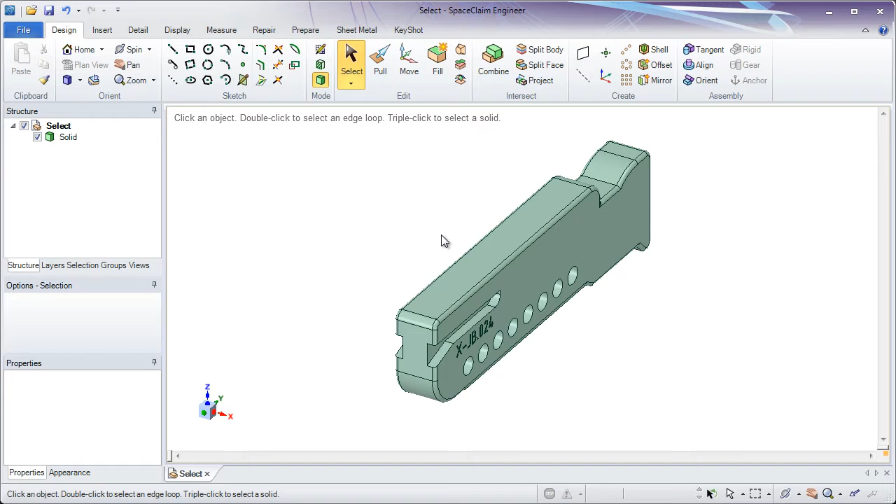Before we get started, as a reminder, to rotate the model, hold the middle mouse button down. To zoom, hold Control and the middle mouse button. And to pan, hold Shift and the middle mouse button. Remember, if you want to change the way you spin, pan, zoom, this can be done in the Options panel under Navigation.

Now, the basics of Select are pretty simple. Click on something on screen to select it. The important thing will be knowing whether you've selected a face versus an edge versus a point or a vertex. If you start to select different things and you want to know what's selected, you can always look in the bottom middle of the screen to see what's highlighted here.

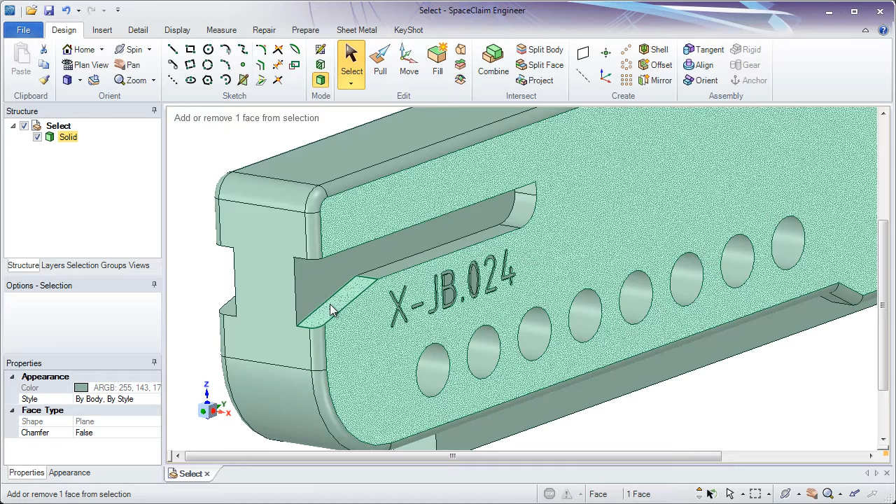And if you hold the Control key down, you can select on multiple things. You can even select on edges, faces, and vertexes at the same time. Every time you have something selected, you can go to this middle of the screen to see what's in your selection. In this case, I have 3 faces, 2 edges, and 2 vertices. The same way I add to my selection by holding the Control key down, I can use this to remove things from my selection. By Control unselecting things, I now have 1 face, 1 edge, and 2 vertices.

The fastest way to remove things from your selection are 2 different ways. You can click in white space anywhere here, and it instantly removes things from your selection. The second method, if I have things selected as I do here, is pressing the Escape key on your keyboard. Pressing Escape will also remove things from your selection.

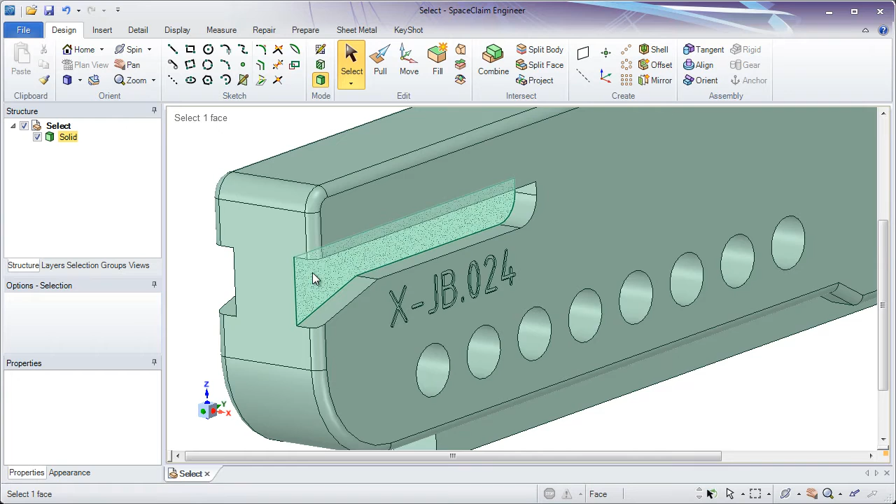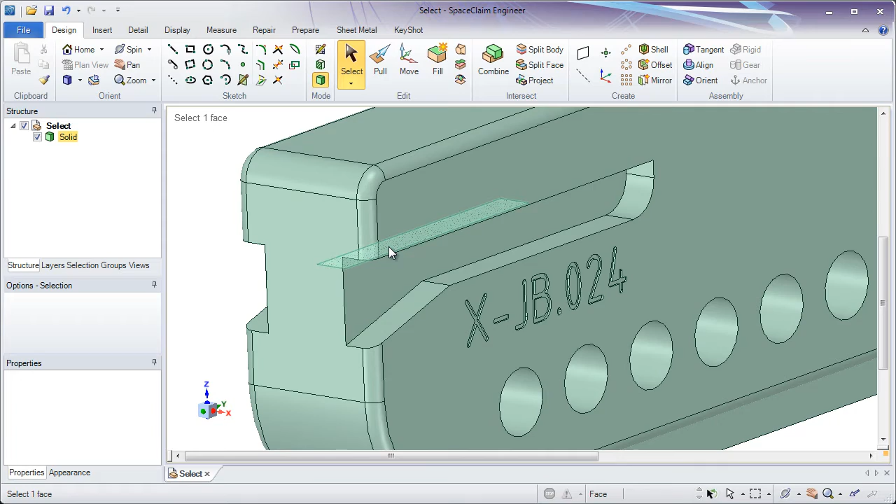Now, as we're moving through the model and selecting things, sometimes you want to select on hidden things on a model. This can be done by using the mouse wheel on your 3-button mouse. The same way you would scroll up and down a web page is the same way you can scroll through the model in SpaceClaim. It selects straight back through the model to give you all the faces and edges which might be there under your cursor. This can be done again. Scroll your mouse wheel in or out to select what's behind your cursor. Once you have your cursor there, click to select that thing.

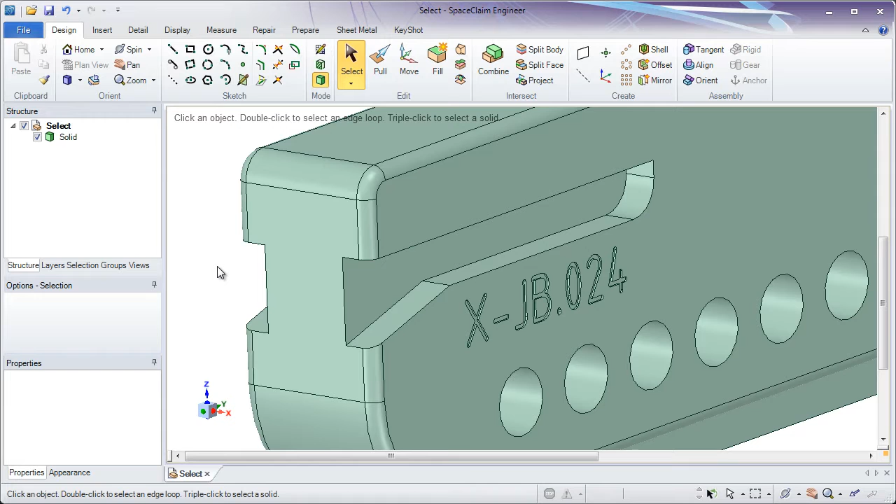As a reminder, if you did go to File, SpaceClaim Options, Navigation, you can set your middle mouse wheel to not query like we've been doing, but so that it zooms in and out. If you do this selection, this option, remember to hold Control to do a query select.

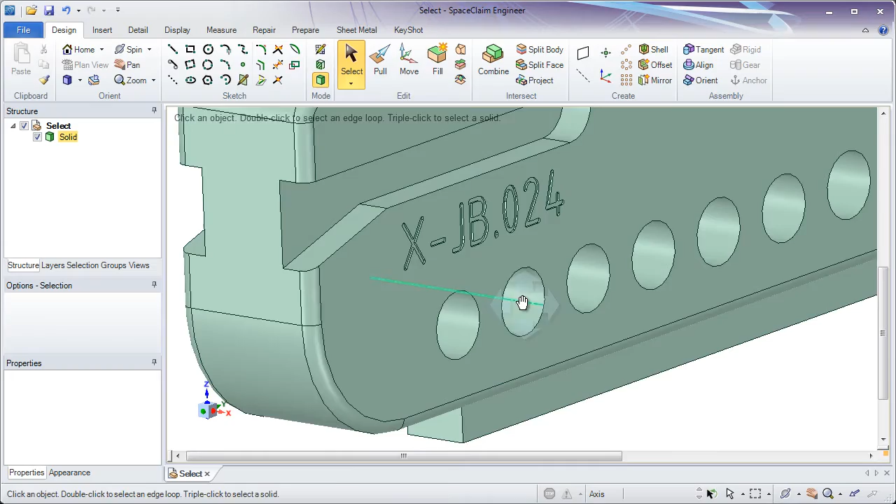Also, while we're here, let's take a look at some of these holes. I want to reinforce the difference between faces, edges, and in this case, holes also have axes. You'll notice as I hover over these holes, axes appear. As I hover over the 4th one, you'll notice the first axis disappears. We provide these temporary axes on the screen to help you select and locate and navigate the centers of holes.

Only 3 will appear at a time, and as soon as you clear your selection by clicking in white space, they all go away. This will be important though, because selecting a face will give you different results in pull and move than selecting an edge and selecting an axis. We can experiment with what happens when you select on an edge, an axis, or face with pull and move later on.

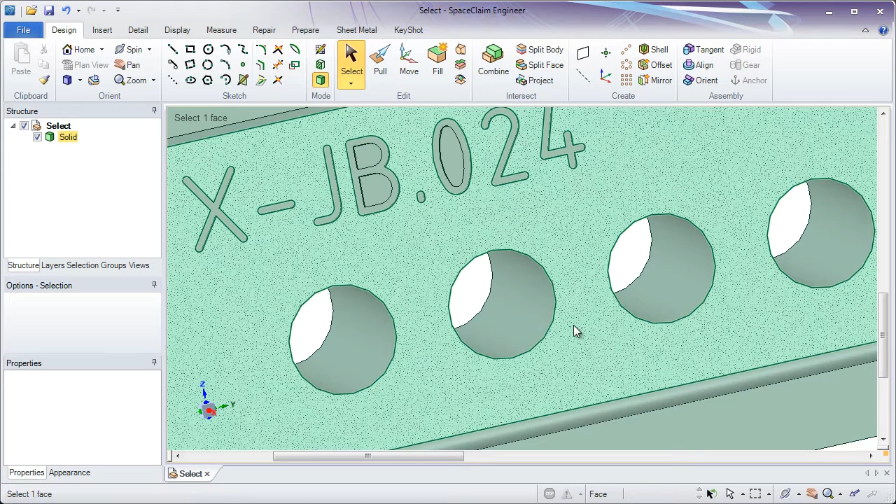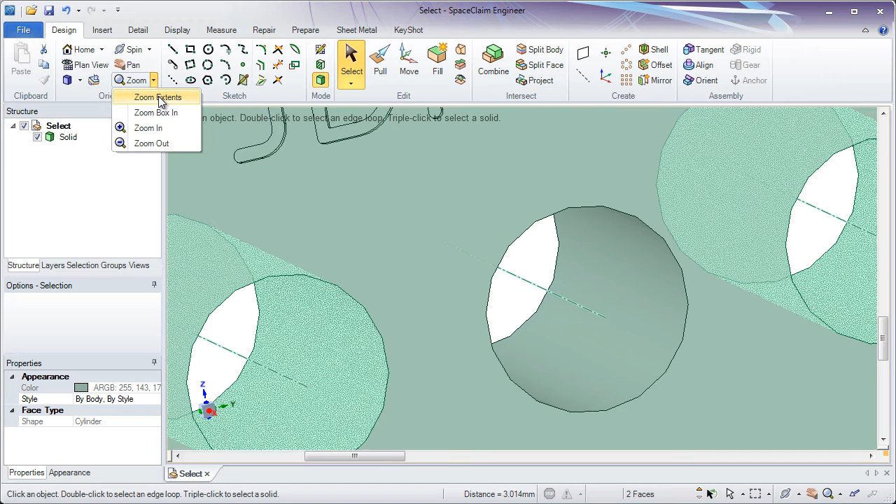Lastly, while we're here, let's look at quick ways to zoom in and out to get our selection. If you have a face selected, there's a very fast way to zoom in on it by going to Zoom, Zoom Extents. This will zoom into whatever is selected. If you have 2 things selected, like these 2 holes, by Control selecting them, you can Zoom Extents to zoom into them. You'll notice the shortcut for Zoom Extents is Z. If I have nothing selected, when I hit Z, it zooms into the complete object.

This is a very fast way to zoom in and zoom out on different things on the screen.

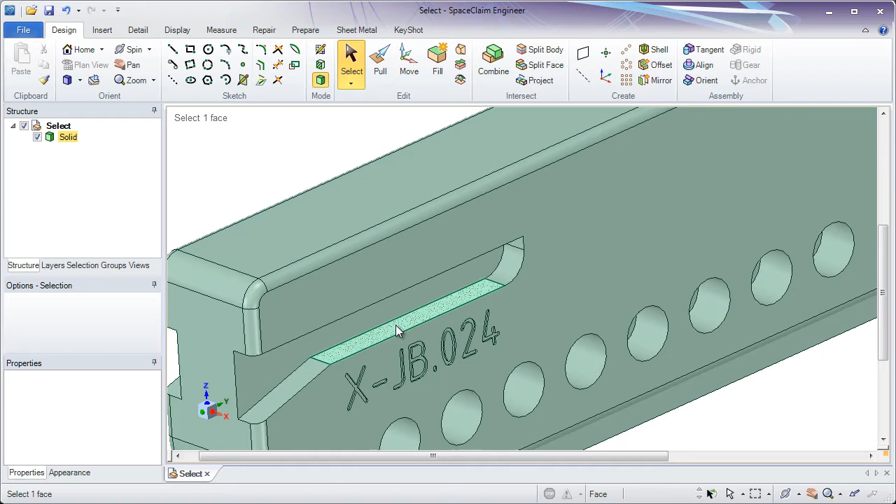Now let's get back to selecting. A common way in SpaceClaim to select multiple things is by double-clicking. This is similar to the convention in Word, where you put your cursor and double-click to expand your cursor to select a single word.

In SpaceClaim, double-clicking will give you tangent faces. You'll notice it selects the face here, the round, and the face on the other side. If you double-click around, it has all of these tangent faces there, but double-clicking a round gives you the round chain. The reason for this is because that's probably what you'd like to modify, either changing the round size to make it larger or smaller, possibly removing it, or toggling it to a chamfer. We've tried to change the selection to make it easier to work with.

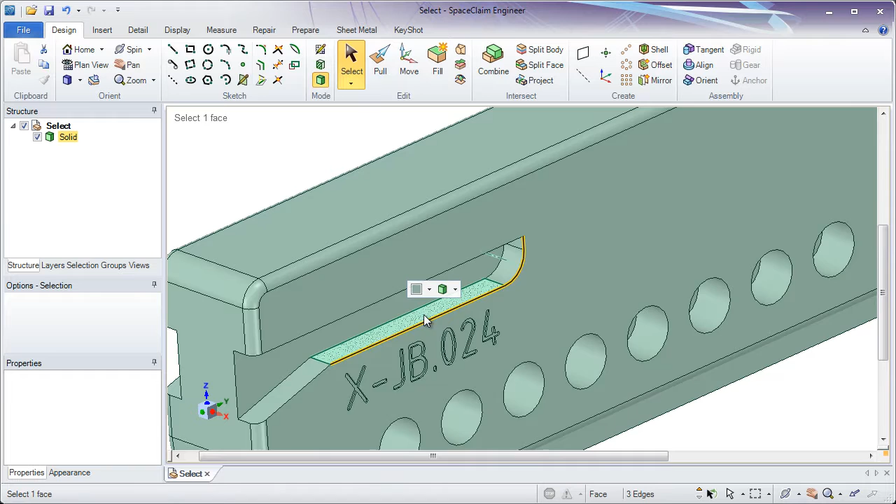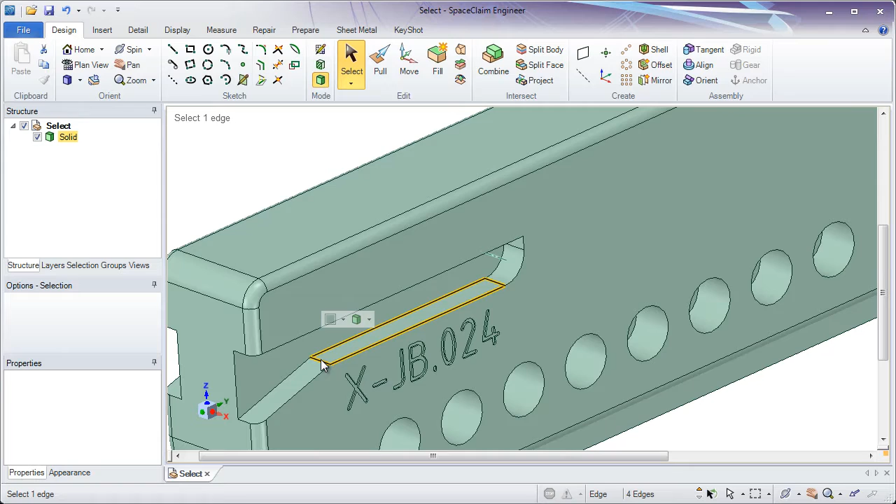Also notice when double-clicking faces, you can double-click edges. Double-clicking an edge will grab you that tangent edge chain. However, what if you wanted a different edge loop, like the loop around this face? Simply double-clicking a second time will toggle to a second edge loop. Double-clicking a third time will toggle to the third edge loop. So double-clicking will toggle through the different possible edge loops that are there. In the case of this face, if there are only two edge loops, it will only toggle between the two available. This is a fast way for grabbing edges around a model.

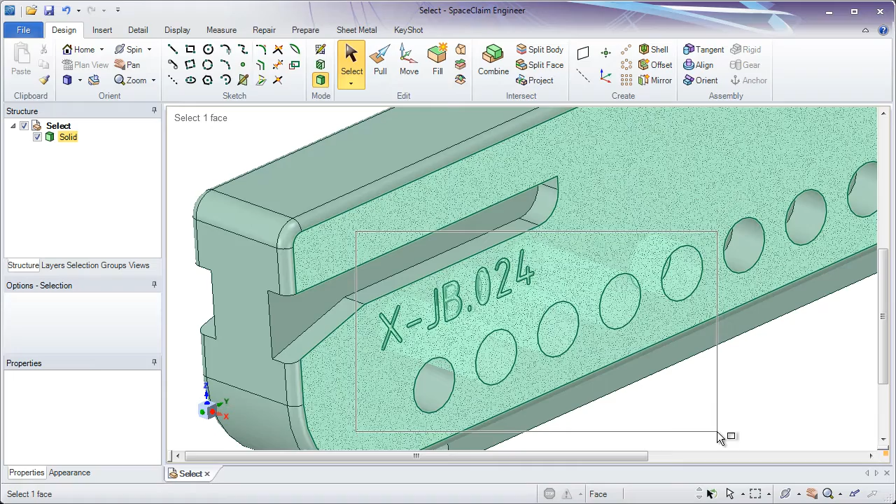One of the most common ways to select things in SpaceClaim is via a box select. It's very useful for selecting a lot of geometry. Holding down your left mouse button lets you draw a box on screen to select everything that encompasses it. The key with box selecting is to pause to see what's in your selection. Right now I have the X. If I make it bigger, I have all the letters and a few of these holes. As soon as I let go of my mouse, I can see what's being selected.

Now the key with box selecting is that there's a difference between box selecting from left to right versus right to left. If I go left to right, only things entirely in my box get selected, and we operate under a smart selection hierarchy, where if I start my box and there's only edges in it, only edges get selected. As soon as faces enter my box, faces begin to be selected. If you'd like to control this, look at our selection filter on the bottom right-hand corner of the screen to get exactly what you need.

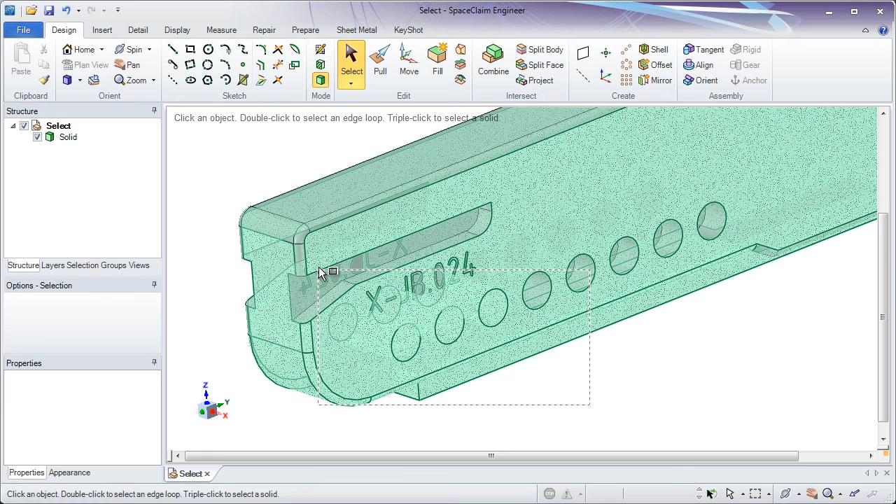Most of the time you'll want to box select from left to right, as I'm doing here, and pause to see what's in your selection. The other method is to box select from right to left. Box selecting from right to left will select anything that crosses your box. Notice I get a lot more geometry really quickly when box selecting from right to left. This is commonly used when changing the color of objects, selecting any piece of a model to hide or show, or moving things into a different layer. For precise selection, it's much more common to box select from left to right. And remember, if you pause for a second, you'll be able to see exactly what's in your box to make sure that's what you'd like to grab.

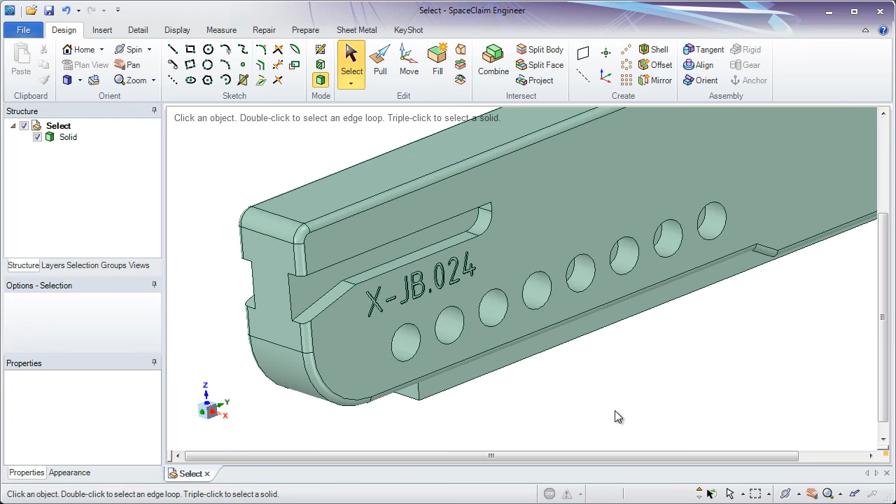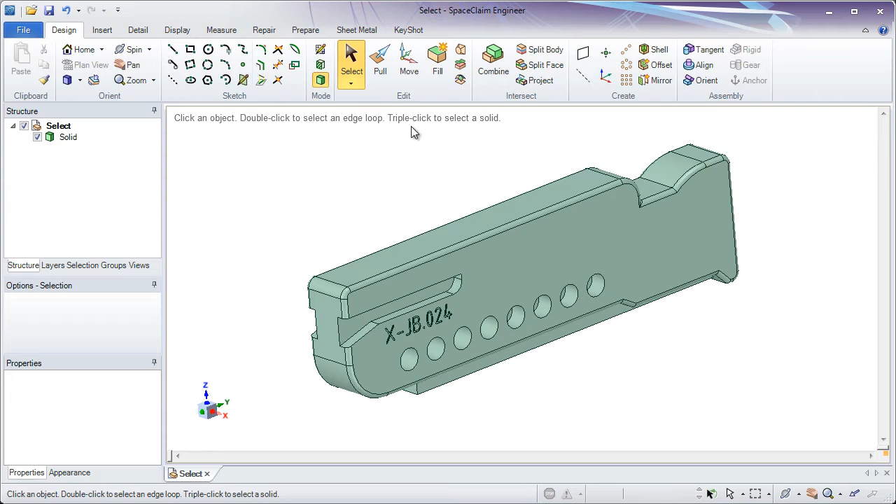I'm going to hit Z one more time to zoom to the extents. The last thing we'll look at is how to quickly select a solid. You'll notice it says here we can click an object, double-click to grab an edge loop, or triple-click to select a solid. Remember, the status messages are helpful to let you know what a particular tool does or what the tool's asking you to do. Triple clicking to select a solid simply involves you to click, click, click.

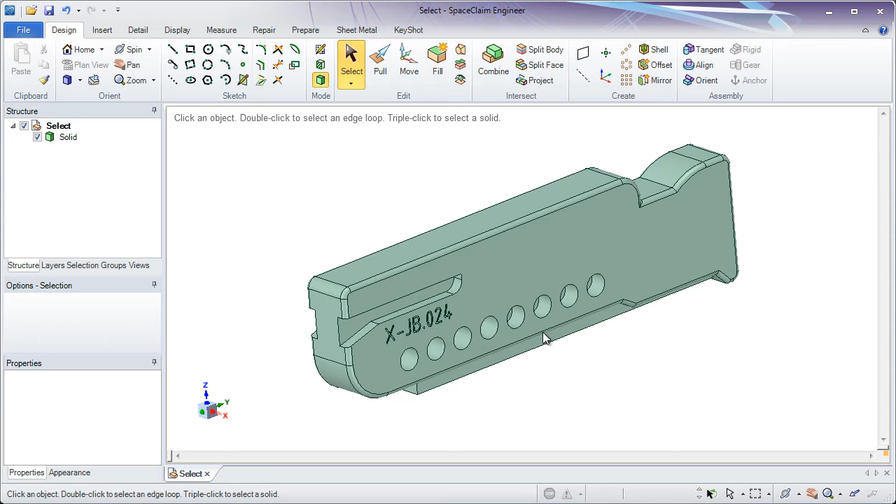If I hover over the face and I click, click, click, you'll notice instead of having faces selected, I have one single body selected. It's the same as a double click, except we have one more at the end. So click, click, click selects a body. Now some people don't like selecting by triple clicking, and that's fine. We have a lot of other techniques for selecting bodies. First off, box selecting the entire model will select that body because all of the faces at the same time are selected, so it automatically up-selects to the body.

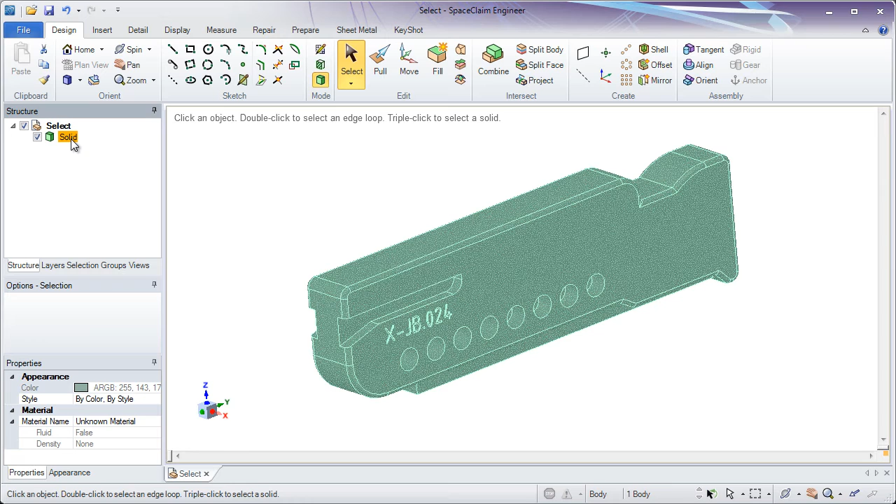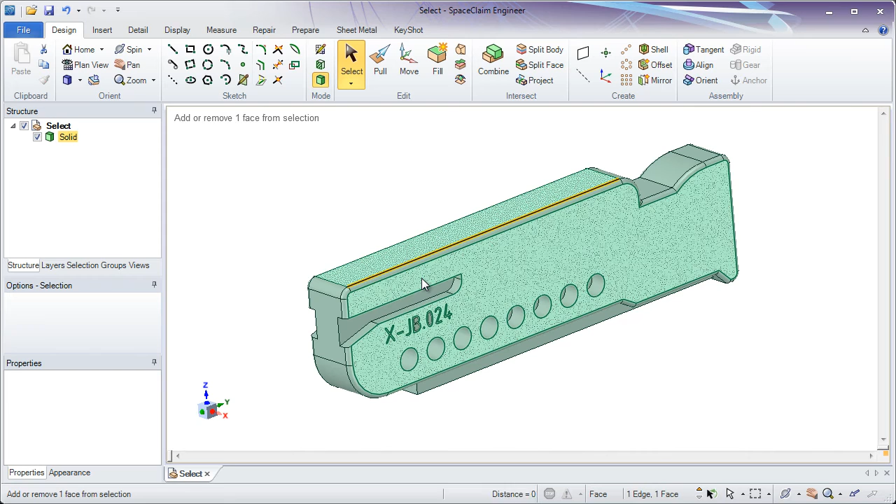If you're not in a situation where box selecting makes sense, selecting from the structure tree is also a valid way for grabbing that body. Whether I triple click, select the body in the structure tree, or box select, all of them give me that body selected. So I hope you've seen different ways to select on objects, and remember, it's going to be critical to know whether you have curves, edges, faces, surfaces, or vertexes selected. So please check the bottom middle of your screen so you can see what's actually in your selection before you make a pull, move, fill, or combine operation. Thank you for watching.